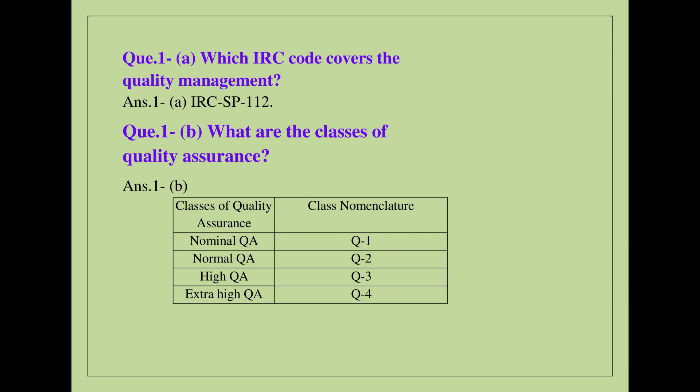Question 1. Which IRC code covers the quality management? Answer: IRC SP 112. Question 2. What are the classes of quality assurance? Answer: Classes of quality assurance, class nomenclature: Nominal QAQ1, Normal QAQ2, High QAQ3, Extra High QAQ4.

Question: What are the various components of quality management plan? Answer: The main components of quality management plan are as under. 1. Brief particulars of projects. 2. Scope of civil works. 3. Applicable documents and references. 4. Quality policy. 5. Contractor's organization. 6. Control of methodology.

7. Human resources and training. 8. Control of materials and product identifications. 9. Control of machinery. 10. Control of laboratory testing facilities. 11. Control of traffic management. 12. Interaction between personnel of contractor and engineer.

Question: Why do you carry out calibration of laboratory equipments? Answer: The calibration is done so that results are accurate. Question: What is the frequency of calibration of laboratory equipments? Answer: 1. Load measuring devices, compression testing: every year. 2. Length measuring devices, micrometers, calipers, steel rules, dial gauges: every year. 3. Temperature measuring instruments, thermometers, ovens, water baths: every year

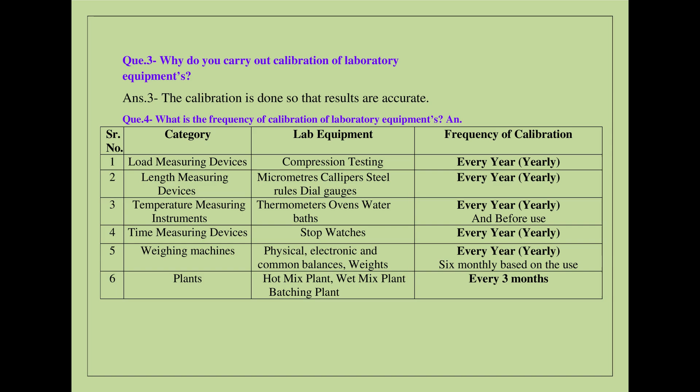and before use. 4. Time measuring devices, stopwatches: every year. 5. Weighing machines, physical, electronic and common balances, weights: every year, six monthly based on the use. 6. Plants, hot mix plant, wet mix plant, batching plant: every 3 months.

Question: Which IRC code is applicable for 2 to 4 lane or new 4 lane construction of highways? Answer: IRC SP 84 2019, Manual of Specifications and Standards for 4 laning of highways, and IRC SP 87 for 6 laning. Question: What are the guidelines for use of new material in the project? Answer: IRC SP 87 describes the following conditions. The proposed new material should be an equal or better product. It should be covered in any of the international standards, code of practice, specifications, guidelines etc. The new material should have been used in similar projects and certified for its successful performance for at least 5 years of its service life.

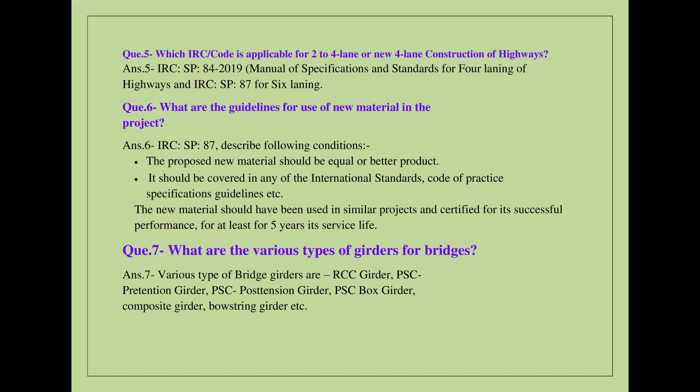Question: What are the various types of girders for bridges? Answer: Various types of bridge girders are RCC girder, PSC pre-tension girder, PSC post-tension girder, PSC box girder, composite girder, bowstring girder etc. Question: What do you understand by PSC girder? Answer: Full form of PSC is pre-stressed concrete. Here PSC girder stands for a girder in which desired compressive stress is induced in the girder to counteract designed live load and dead load.

Question: What all will you check before launching a PSC girder? Answer: Checkpoints are as follows. 1. The girder shall be checked visually for any cracks on surface etc. 2. Hogging shall be checked to ensure it is within permissible limit. 3. Complete barricading of the area shall be ensured for safety. 4. The site of erection and the approach to be leveled, dressed and rolled, if required, so that the machineries, viz. cranes and trailers, move and can be placed on firm ground in correct position.

5. All lifting tackles, viz. slings, D-shackles, U-clamp ropes and temporary packing with wooden blocks etc., to be checked regarding quality and soundness and kept near site. 6. Bridge bearing location over bearing pedestal has to be checked. 7. Temporary girder arresting arrangement after launching needs to be ensured to avoid falling of girder. 8. Entire movement area of girder has to be cordoned off from the movement of workforce and general public.

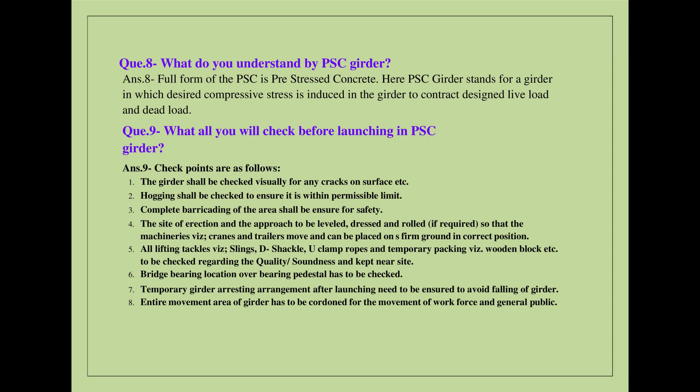Question: What are the various types of pile testing? Answer: Basically there are two types of pile testing. 1. Initial load test. 2. Routine load test. Question: What do you understand by high performance concrete? Answer: High performance concrete, HPC, is designed for at least one of the following outstanding properties. 1. Compressive strength. 2. Workability. 3. Enhanced resistance to chemical or mechanical stress. Usually water-cement ratio is kept 0.2.

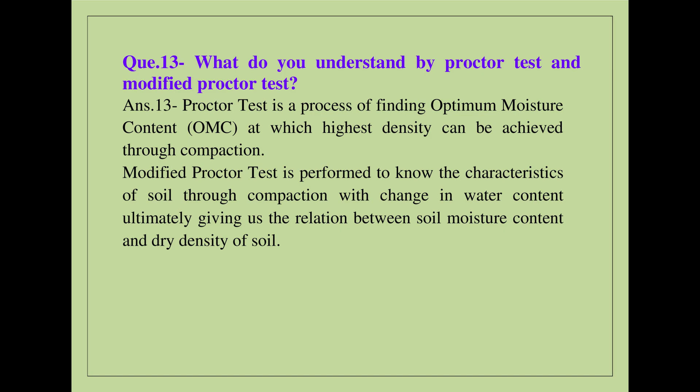Question: What is the difference between quality assurance and quality control? Answer: Quality control can be defined as part of quality management focused on fulfilling quality requirements, while quality assurance relates to how a process is performed or how a product is made. Question: What do you understand by Proctor test and modified Proctor test? Answer: Proctor test is a process of finding optimum moisture content, OMC, at which highest density can be achieved through compaction. Modified Proctor test is performed to know the characteristics of soil through compaction with change in water content, ultimately giving us the relation between soil moisture content and dry density of soil.

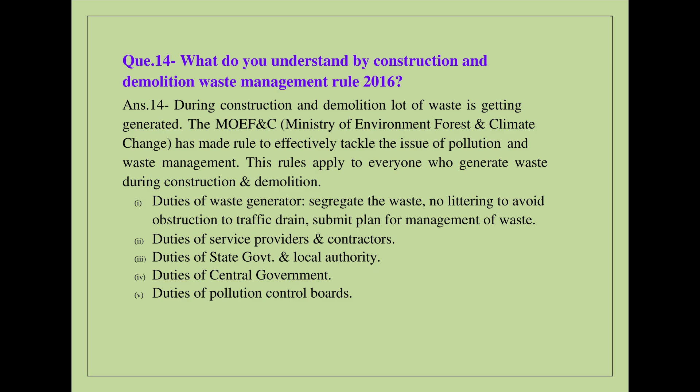Question: What do you understand by Construction and Demolition Waste Management Rules 2016? Answer: During construction and demolition a lot of waste is generated. The MoEFCC, Ministry of Environment, Forest and Climate Change, has made rules to effectively tackle the issue of pollution and waste management. These rules apply to everyone who generates waste during construction and demolition. 1. Duties of waste generator: segregate the waste, no littering to avoid obstruction to traffic and drains, submit plan for management of waste. 2. Duties of service providers and contractors. 3. Duties of state government. 4. Duties of central government. 5. Duties of pollution control boards.

Question: What are the various types of highway pavements? Answer: Basically, highway pavements are of two types: 1. Rigid, 2. Flexible. Question: What are the various layers in rigid pavements? Answer: Pavement quality concrete, M40, PQC, 280 to 300 mm; dry lean concrete, DLC, 150 mm; granular sub-base, GSB, 150 to 300 mm; sub-grade 500 mm; embankment.

Question: what are the various layers in flexible pavements? Answer: BC, bituminous concrete, 50 mm or 40 mm. DBM, dense bituminous macadam, 90 mm to 130 mm. WMM, wet mix macadam, 250 mm, in two layers of 125 mm each. GSB, granular sub-base or CTGSB, 200 mm to 300 mm.

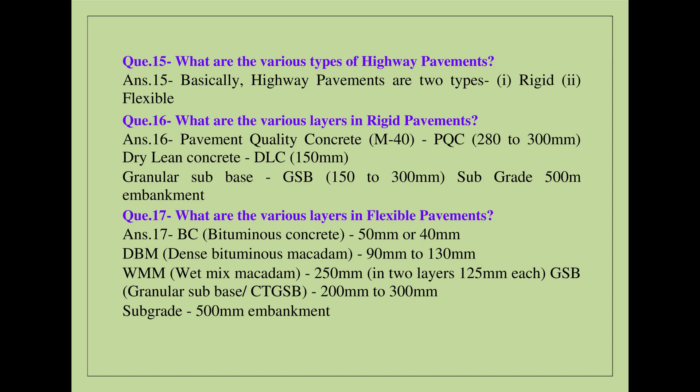Subgrade, 500 mm embankment. Question: what are the various grades of DBM? Answer: DBM is two types, grade 1 and grade 2. BC is two types, grade 1 and grade 2. Question: what is the permissible limit for gradient? Answer: plain rolling terrain, ruling 2.5%, limiting 3.3%. Mountains, ruling 5%, limiting 6.0%.

Question: what is the vertical clearance for underpasses? Answer: vehicle underpass, vertical 5.5 meters. Question: what is the minimum height requirement for embankment? Answer: 1. Top of the subgrade shall be at least 0.60 m above the general ground level in case of existing road. 2. Bottom of the subgrade shall be 1.0 meters above the HFL. Question: what does CBR stand for? Answer: California bearing ratio. Higher CBR value indicates better quality of earth.

Question: what is the method of design of flexible pavement? Answer: flexible pavement is designed as per IRC 37. Design is based on traffic in MSA and CBR value of soil. Question: what is the method of designing rigid pavement? Answer: rigid pavements are designed as per IRC 58 as plain jointed rigid pavements for highways. Question: what is the design period for flexible pavements? Answer: 1. 15 years minimum design period, subject to design traffic not less than 20 MSA. 2. Stage construction shall not be permitted as per the new code.

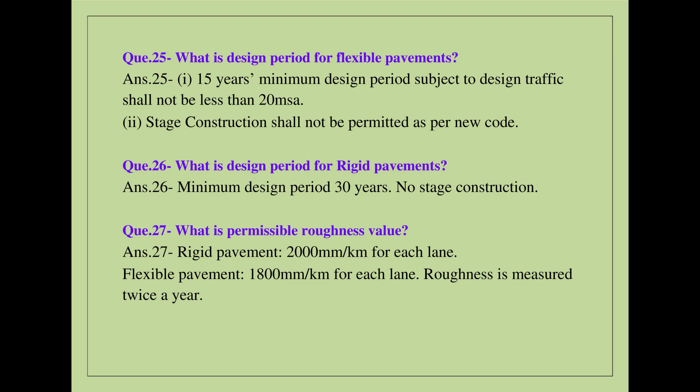Question: what is the design period for rigid pavements? Answer: minimum design period 30 years. No stage construction. Question: what is the permissible roughness value? Answer: rigid pavement, 2000 mm per kilometer for each lane. Flexible pavement, 1800 mm per kilometer for each lane. Roughness is measured twice a year.

Question: what are the various tests to be performed on soil to ascertain its suitability for road construction? Answer: 1. CBR value. In case available material fails to meet the CBR requirement, a stabilization method is to be followed. Free swelling index, max permissible 50%. Liquid limit, max permissible 50. Plasticity index, max permissible 25.

Question: what are the various things to check to ascertain the suitability of sand for road construction? Answer: 1. Sand should be free from mica content, otherwise it shall affect durability of concrete. 2. It should be free from dirt and silt, otherwise it should be washed and drained for at least 72 hours before use.

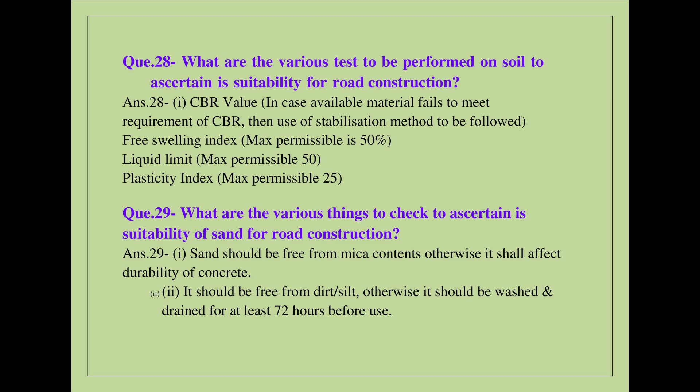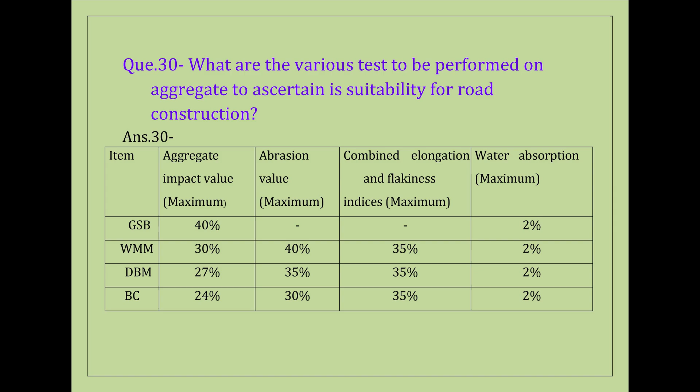Question: what are the various tests to be performed on aggregate to ascertain its suitability for road construction? Answer: aggregate impact value, maximum; abrasion value, maximum; combined elongation and flakiness indices, maximum; water absorption, maximum. GSB 40%, 2%. WMM 30%, 40%, 35%, 2%. DBM 27%, 35%, 35%, 2%. BC 24%, 30%, 35%, 2%.

Question: what are the various grades of bitumen used in highway construction? Answer: VG 40, VG 30, VG 20, VG 10. VG stands for viscosity grade. Question: how do you measure scour depth practically when the pier is underwater? Answer: it is determined by actual measurement on ground by soundings using a heavy plumb, or physical measurements using a long bamboo. Question: what do you understand by PSC girder? Answer: PSC is pre-stressed concrete. A PSC girder is a girder in which desired compressive stress is induced to counteract design live load and dead load.

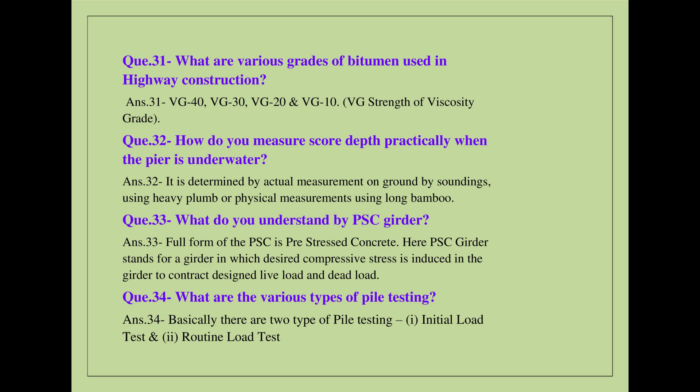Question: what are the various types of pile testing? Answer: basically two types: 1. Initial load test, 2. Routine load test. Question: why do you carry out pile load testing? Answer: to find out the load carrying capacity of the pile. Initial pile load testing finds the ultimate load carrying capacity, and routine load test is done to ensure design load. Question: what is the difference between quality assurance and quality control? Answer: quality control is part of quality management focused on fulfilling quality requirements, while quality assurance relates to how a process is performed or how a product is made.

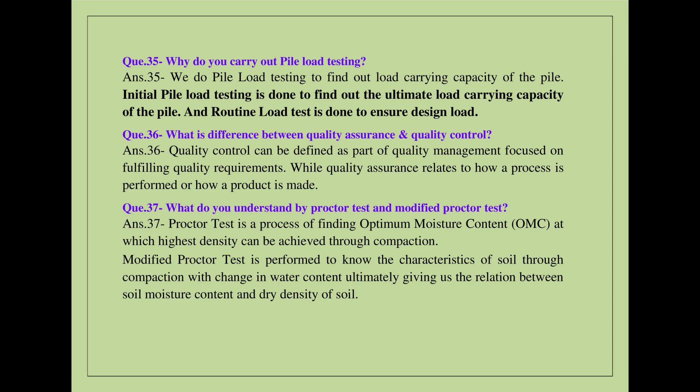Question: what do you understand by Proctor test and modified Proctor test? Answer: Proctor test is a process of finding optimum moisture content, OMC, at which highest density can be achieved through compaction. Modified Proctor test is performed to know the characteristics of soil through compaction with change in water content, ultimately giving the relation between moisture content and dry density of soil.

Question: what do you understand by work zone traffic management plan? Answer: the measures taken in the construction zone to ensure safety and smooth movement of traffic are called Work Zone Traffic Management Plan, IRC SP 55. Considered are: safety for road users and workers, minimum hindrance and delay to road users, clear guidance to avoid confusion, roadside safety by barricading. This is achieved by road signs, barricading, flag system, traffic cones, hazard markers, retro-reflective painting for night signs, etc.

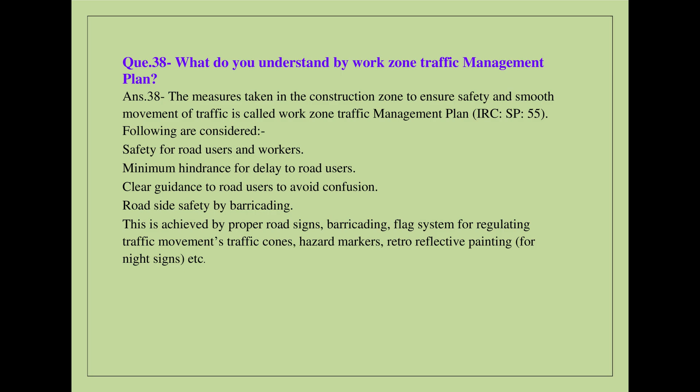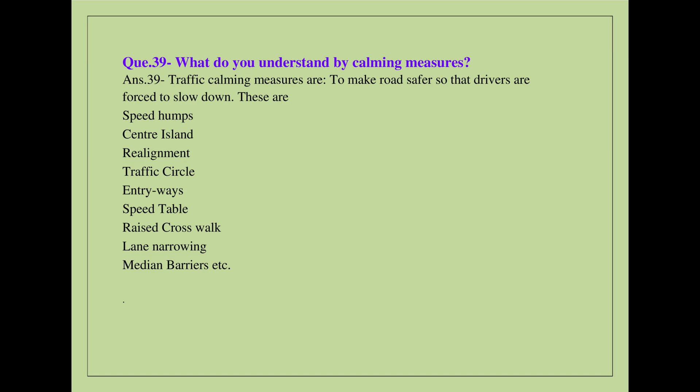Question: what do you understand by calming measures? Answer: traffic calming measures make roads safer by forcing drivers to slow down. These are speed humps, center island, realignment, traffic circle, entryways, speed table, raised crosswalk, lane narrowing, median barriers, etc. Question: what do you understand by composite girders? Answer: bridges where the concrete deck slabs and main steel girders work together to resist loads are called composite girder bridges.

Question: what is the design life of structures? Answer: all components are designed for 100 years. Question: what are the various types of foundations for bridges? Answer: 1. Open foundations, 2. Pile foundations, 3. Well foundations, 4. Raft foundations.